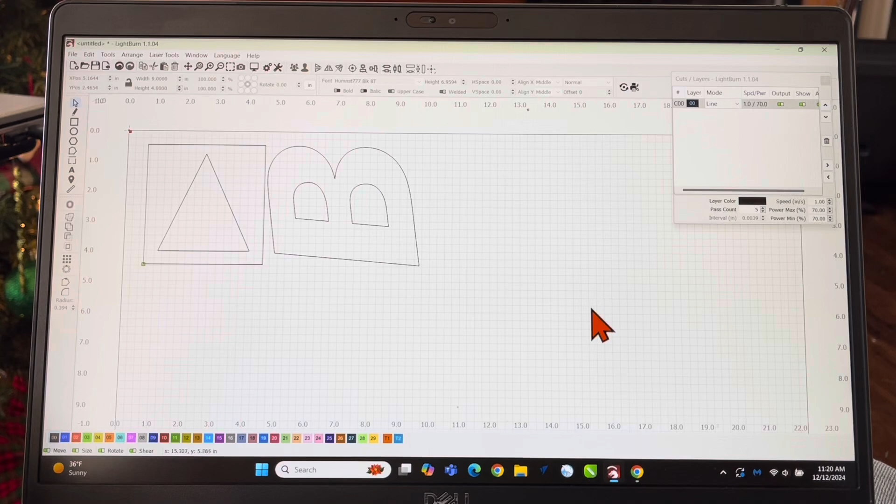Alright y'all, let's walk through the steps to get your file ready to input into the plasma machine. So we're going to start out with Lightburn. Got your design drawn out. Your size is 9x4. So let's just export. We're going to export it in SVG. You can save it in a DXF through Lightburn, but in my experience, that changes the sizes. The sizes do not stay consistent, so it's easier to just save as an SVG from here.

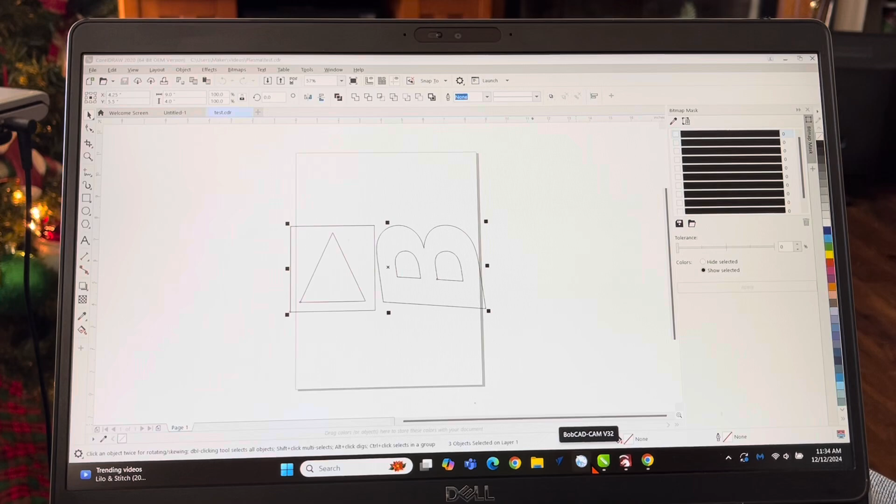Then we'll go into CorelDraw. Check your sizes up here, see if they're still the same. 4x9. Then you just want to export again. This time you want to save it as a DWG. Alright, with our DWG file saved, we'll go into BobCad.

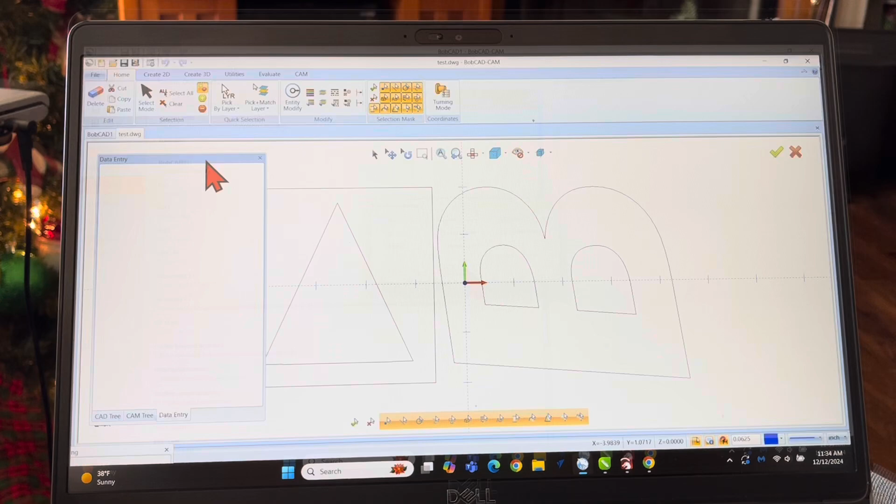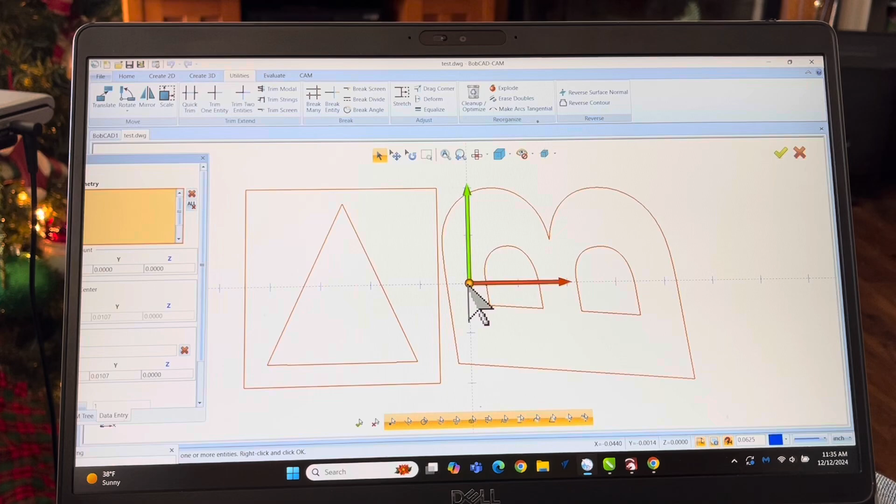Open your file. Need to change this down to DWG so it'll show up. Here's our test. Alright, so when your design pops in, it'll always be straddling the crosshair here. It needs to be up in this upper right quadrant. So to move it, there's different ways to do this. The way that works for me is utilities, translate, draw a box around it, hover over the center dot and left click, and right click OK.

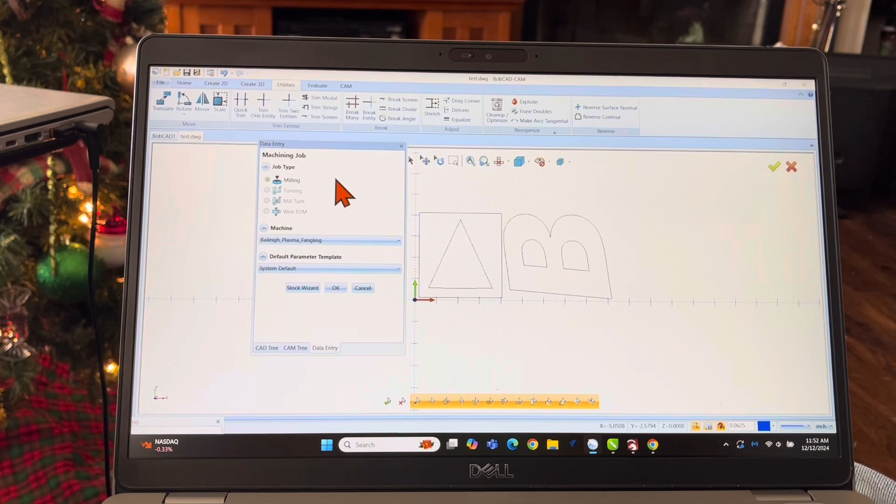Alright, get your data entry window here, grab your cam tree, right click cam defaults, new job, leave it on milling, leave it on the plasma table, go straight into the stock wizard. Next arrow, you don't have to change anything here. Next, and next, click OK.

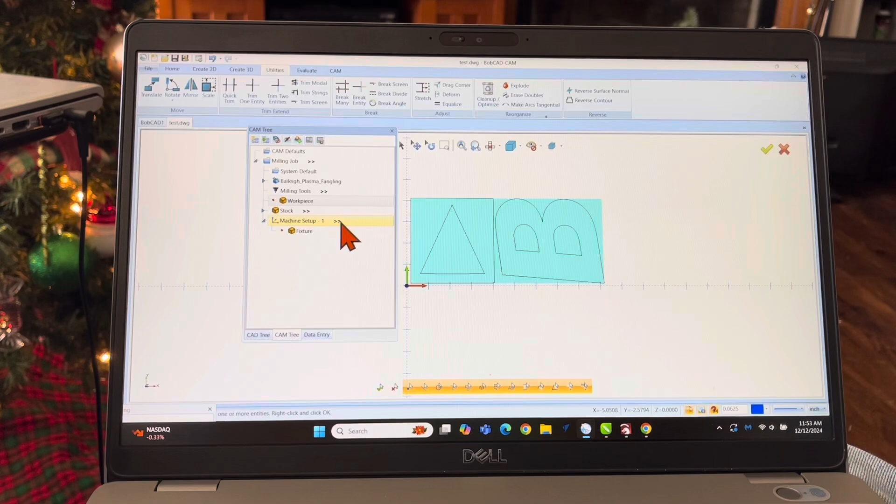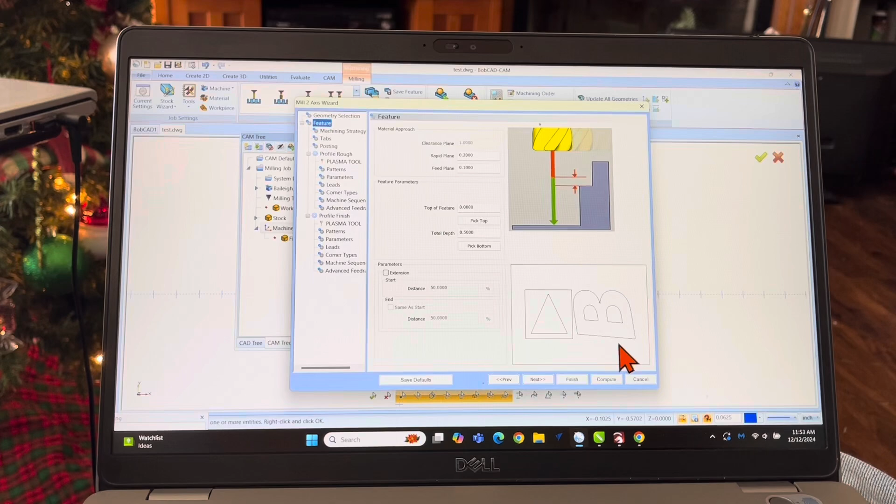Now machine setup 1, right click, mill 2 axis. Here's where you want to select your geometry. Click a box, draw a box around it, and click OK. Now just hit the next button. This little square box here, you want to always see your design in here. If it's not in here, you haven't selected your geometry yet. You don't need to change anything else though.

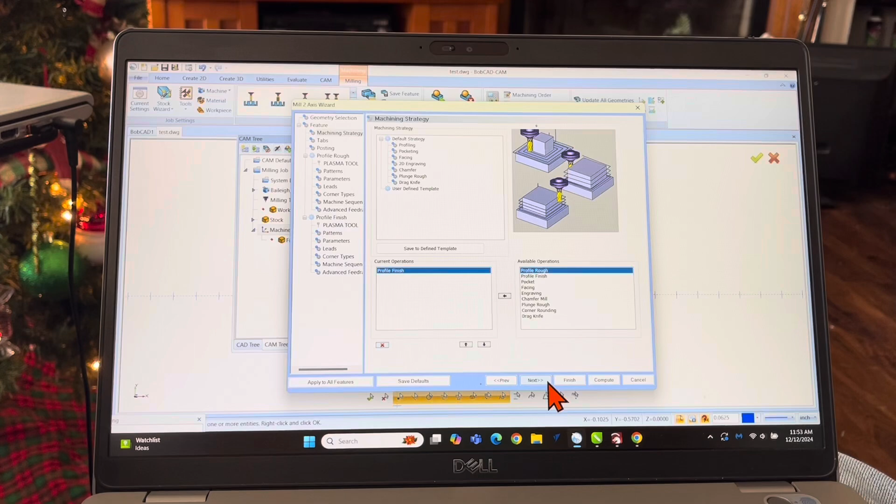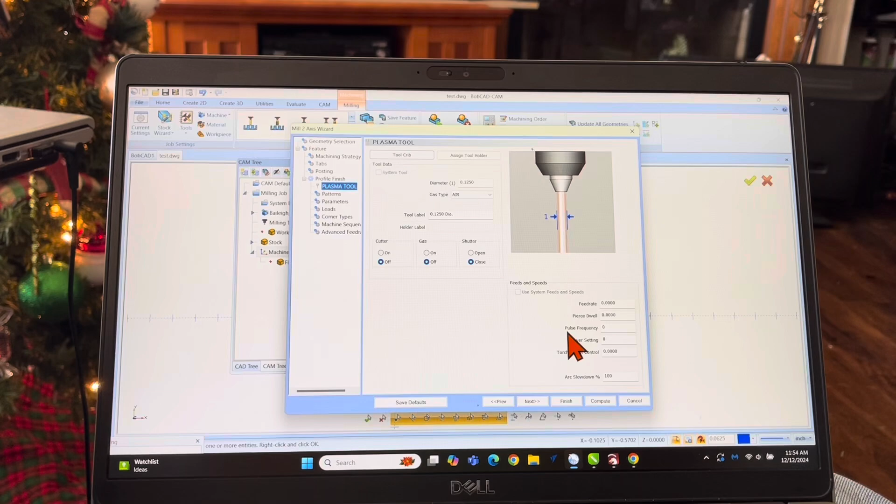Next, you always want to get rid of this profile rough. You only want profile finish left. Don't change any of the other things. Next, this is where you can put tabs in if you want, so your part stays into your cut piece. You can do that in the design as well. Next, offset 1 should never change. Arc move should never change. Next, you don't have to change anything here because we actually set all this stuff in the console itself.

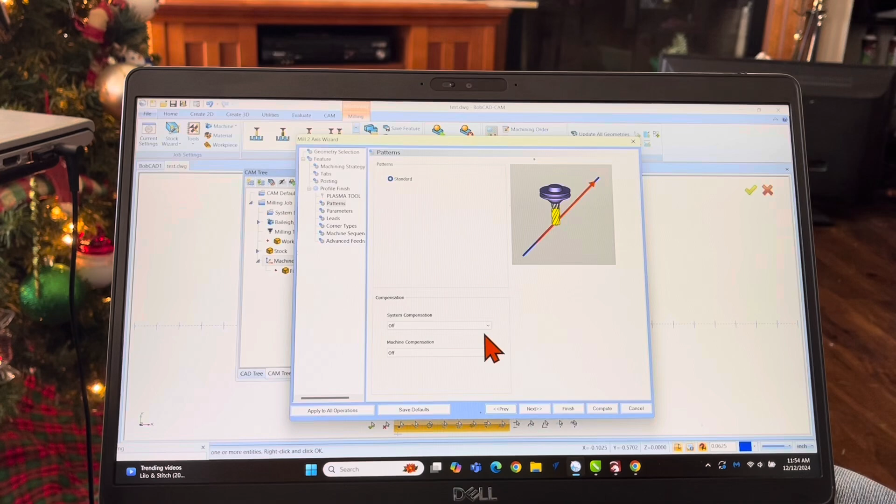Next, this is where it's going to cut: on the line, inside the line, or outside the line. So left is inside the line, right is outside the line, and off is dead center on your design line. Kind of depends on what it is you're cutting and where you want it. For what we're doing, we'll do right, to the outside of the line. If you do inside the line, it changes the dimensions of your final part. So we're doing right compensation outside the line. Next, don't change anything here.

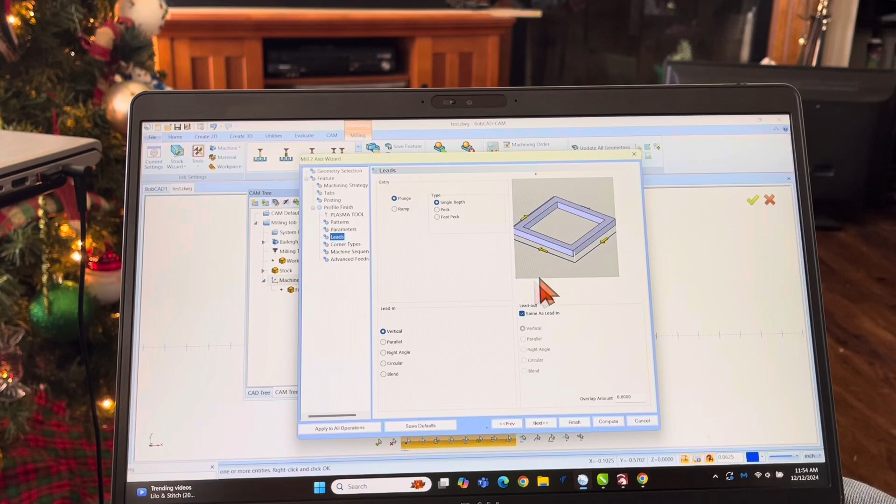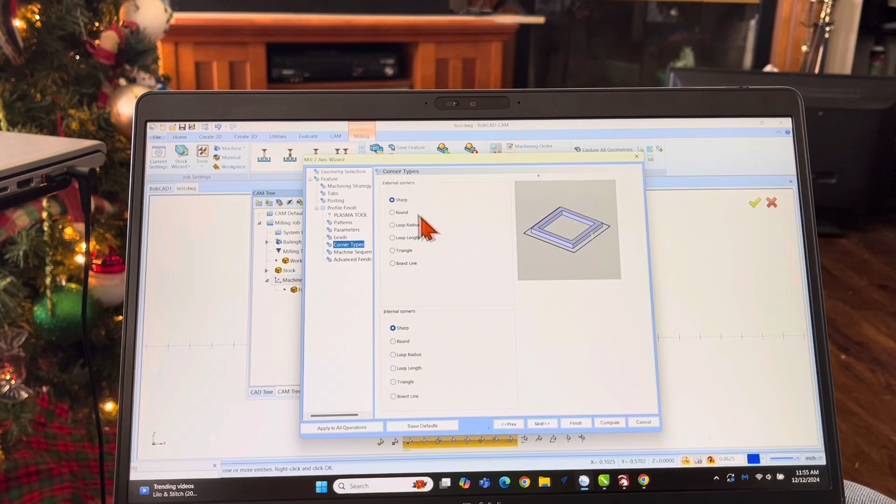Next, this is your lead ins, where it starts to cut it. We're going to do right angle, where it's coming from outside of your design, and the lead in 1/8 inch, .125. Next. This is if you want your corners sharp or rounded. That's inside and outside. We're going to leave them both on sharp. Depends on what your design is. Next.

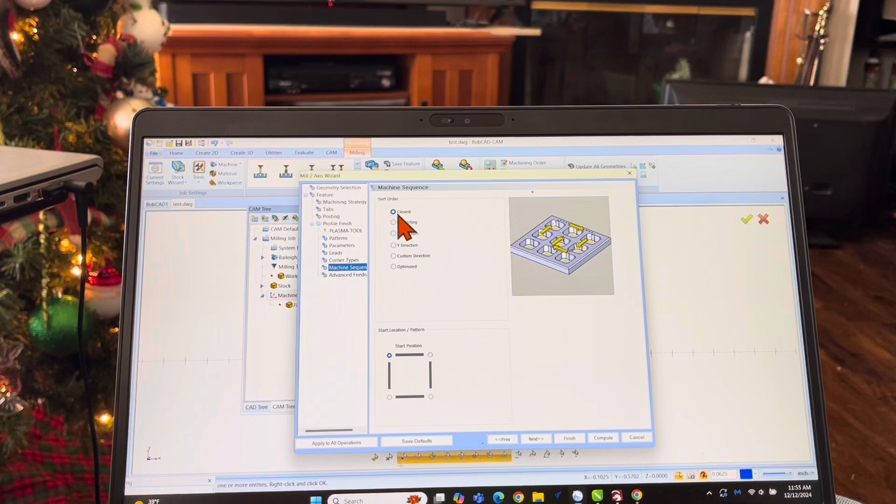This is the sequence in which it cuts your design, cuts your geometry. If you have quite a bit of a cut, a lot of different inside outside cuts, you'll want to use optimized. I found for this one that we're testing, I had to leave it on closest because otherwise it would not write the G code. So usually you want to try optimized, and if it doesn't write your code, come back and change this to closest. Next. And then we're ready to compute. You don't change anything in the feed rate. It's all done inside the console.

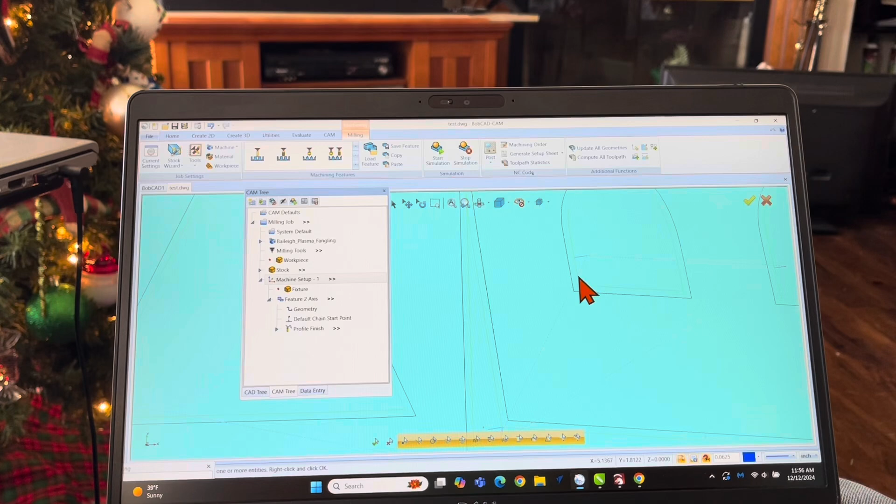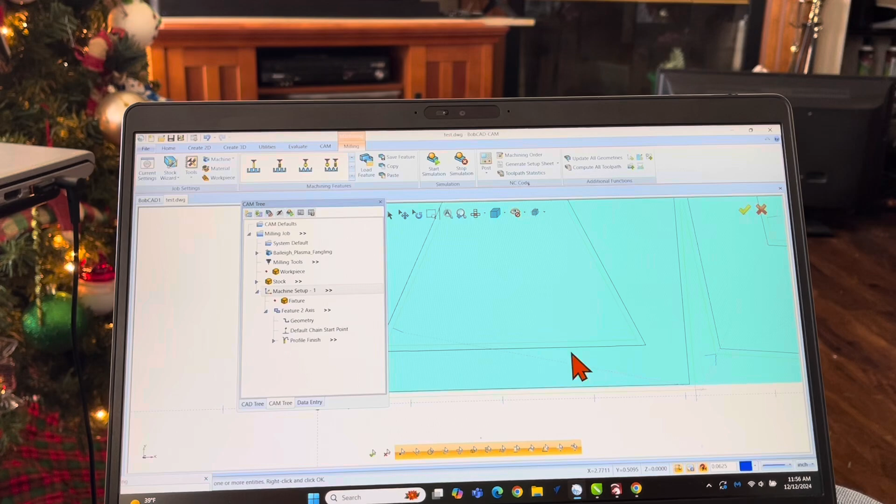So we'll do compute. And as you can see, it's got some added lines now. This is showing you the yellow line where it's gonna actually cut inside of the B. Gonna cut inside. Out here it's gonna cut to the outside. This is your lead ins and your lead outs. Same way with the square, it's cutting the square on the outside. Cutting the triangle on the inside. So now we have got the code generated.

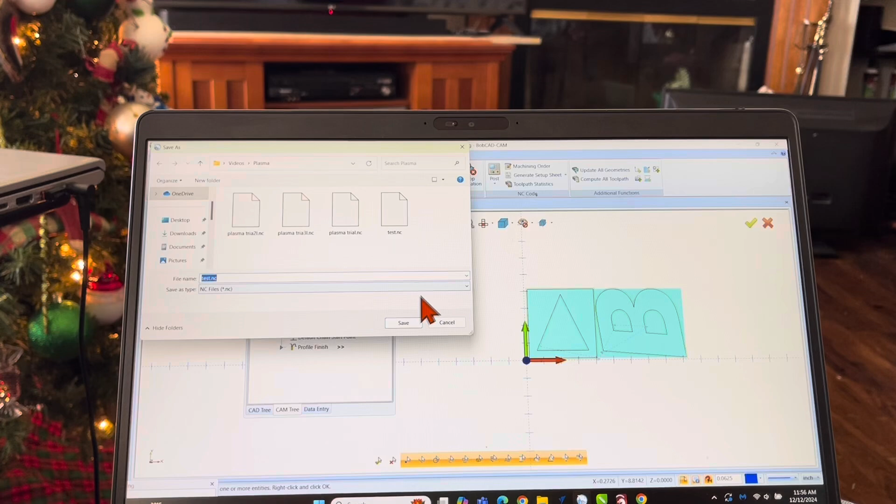So you want to click post, post and save. Put it where you can find it, and as you notice, it's an NC file. That's what's required for the console to read the G code. The NC file automatically will do it in that format. And we'll replace the one that I didn't get right earlier, and we should be ready to go. So now we'll take the flash drive and put it over into the console.